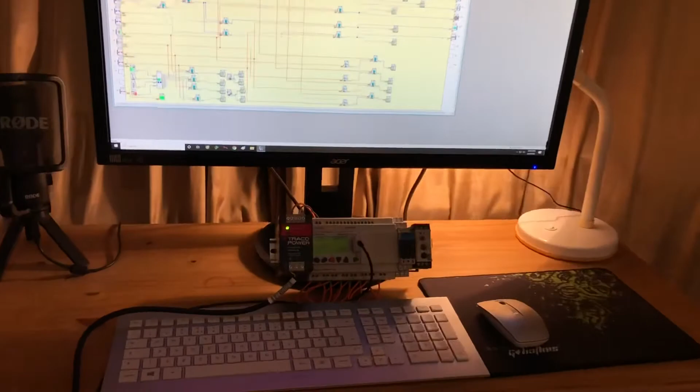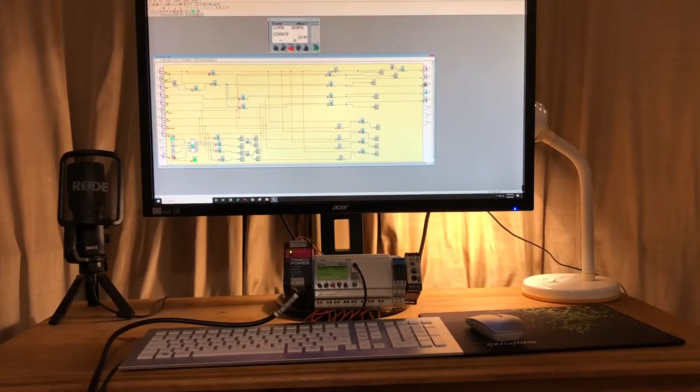Automation can be our friend, but at the same time can be our enemy. I observed that unemployed people and people who are bored want more complex technology, while people who are working hard, when they come home, don't want to spend 5 years taking special courses just to turn a boiler on and off. I think good technology should do all jobs for you.

Unless you're a computer or mobile phone maniac who likes to show your girlfriend how you change the temperature in your home in the UK while sitting on a beach in the Bahamas, I think a PLC should do it all for you.

I've worked for very rich people and also for poor people in my life. It seems to me that poor people like more gadgets, while rich people, when they come home, want only one switch to turn things on and off. But don't get me wrong, that one switch must be intelligent enough to do it all for you, and for that you need software.

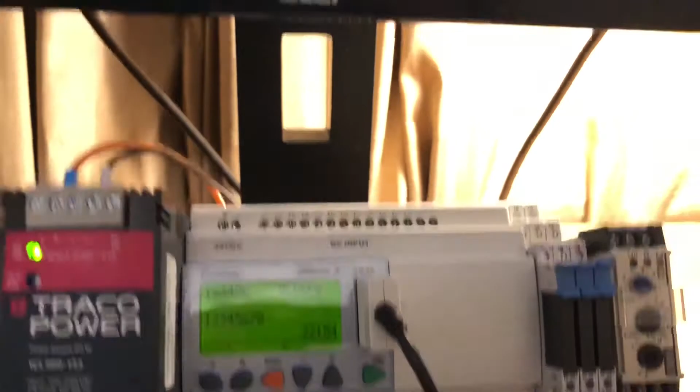If you look at this Crouzet controller, what you see on this screen, you'll also see on the Crouzet controller's display. As I said, the software is very easy to download from the internet, and guess what? It's free.

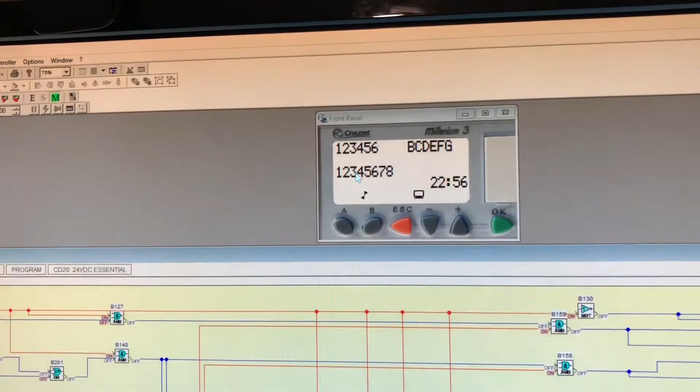If you look at this little screen, you can see that it has the same information that I have on this little PLC.

If you're interested in learning about the software, that's okay. If not, we can do it for you. All you have to do is press the switch I told you about, on and off, and this software will do it all for you.

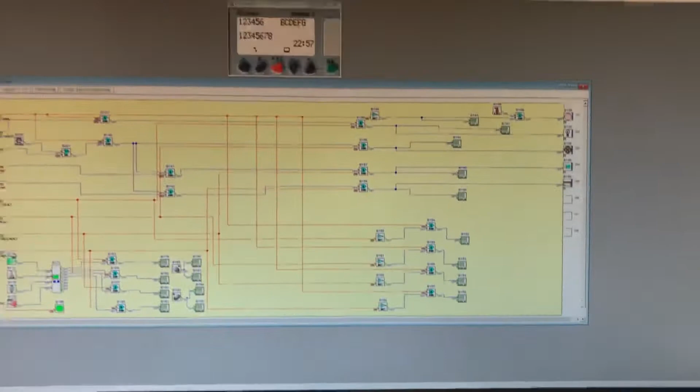So let's simulate a fire alarm failure. If you have a fire alarm failure, the screen will show you a fire alarm. Then, if you repair the fire alarm, the screen will come back to normal.

Then, if everything is okay, you want to bring the light on. And then also you want to bring the fan on, the cooling, and maybe the heating.

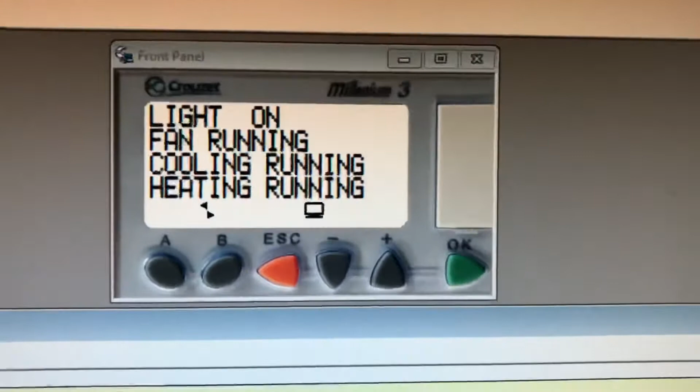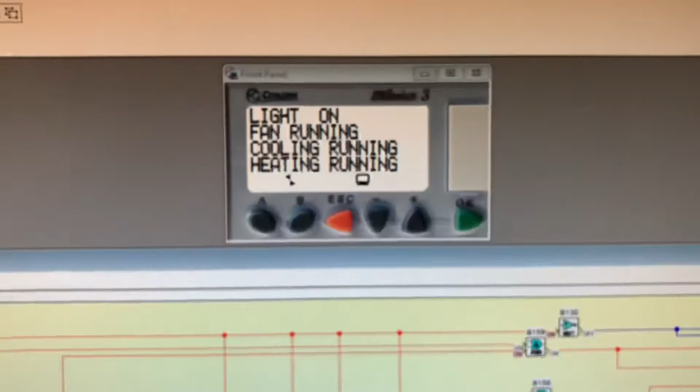Some people say, well, obviously I'm not going to use the cooling and heating at the same time. Yeah, you're right, that would cost a lot of money. I'm using this only in a very special environment where heating and cooling are both necessary, because I want to reduce the humidity without dropping the temperature too much.

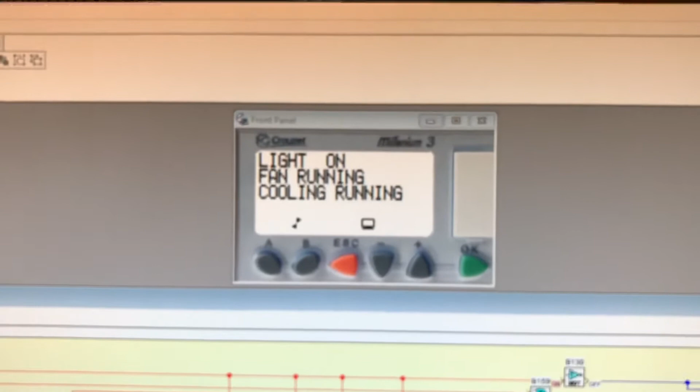Now let's say everything runs well, and I don't need a heater because it's very hot outside. I need only the cooling, but somehow the cooling gets faulty.

What's the beauty about this system? I can write it so it will be friendly. It will tell you the cooling fault - you don't just get numbers like 06, 05.

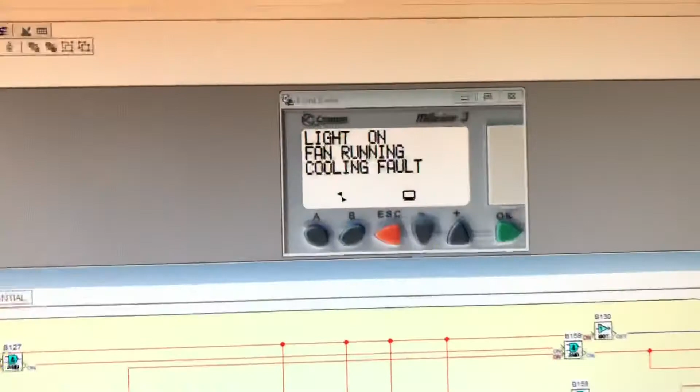When a technician comes into your home, you won't spend 5 hours trying to figure out what's wrong. Now I know some people will say, yes, but what if the heating gets faulty, will it tell us?

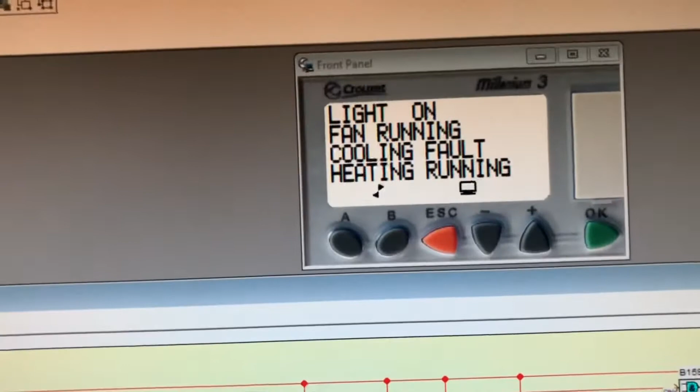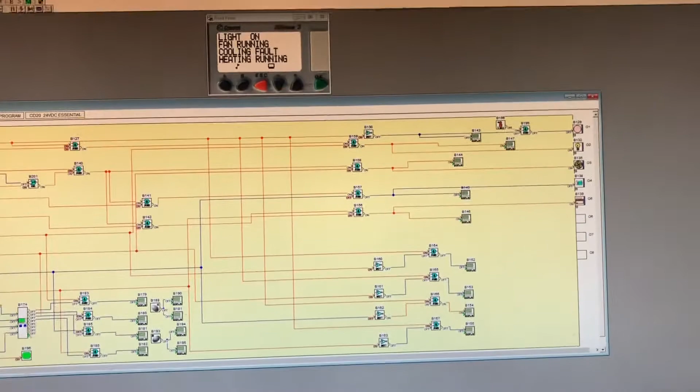Yes, you're right, but at the same time we can use other PLCs if you want, and we can link this input to a lot of features from your boilers, your refrigeration equipment, your air conditioning equipment, your lights, your circuit boards, and actually we can integrate your entire home.

Obviously if you have the possibility to run wires, because we don't like to deal too much with Wi-Fi. People say it's the future, but we want you to be independent of every Wi-Fi and internet failure. We want you to be in control.

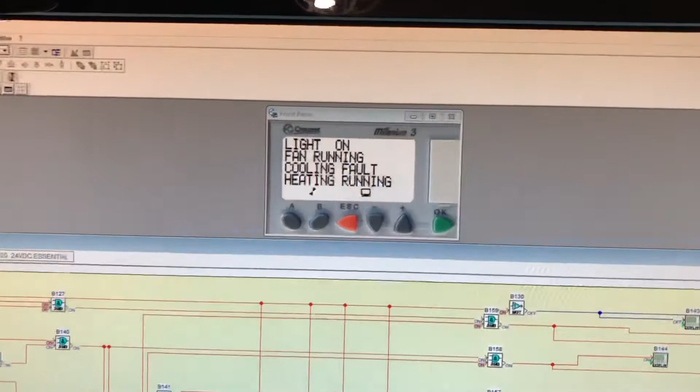A good PLC and a good program is like a soldier sent on a mission to deal with everything. I don't think you'll feel very happy being somewhere on holiday and having to check your mobile phone every 5 minutes, because you have an unreliable system which must be under surveillance. Then you become the PLC of your PLC, and life wouldn't make sense.

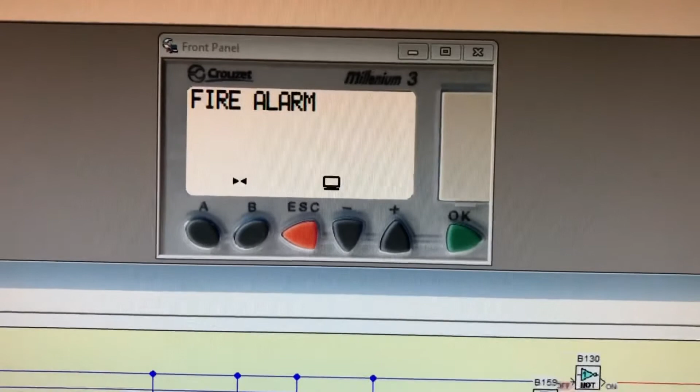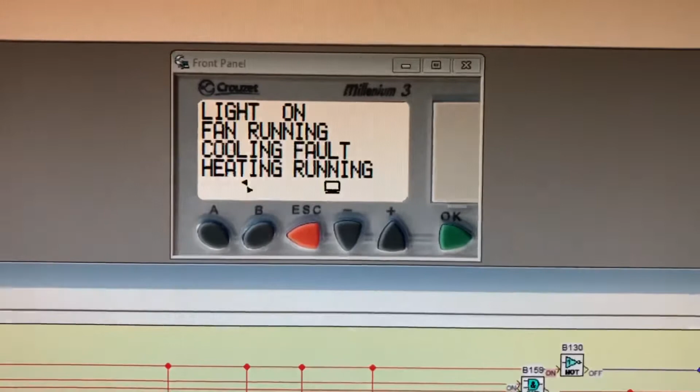So this PLC will control your home in the most logical way. As you'll see, everything runs well, but if you have a fire alarm, everything will go off. We can leave some features on, like the fridge or other critical features, because if they get turned off, you'll have problems at your return, like rotten food. So this is a reasonably good PLC.

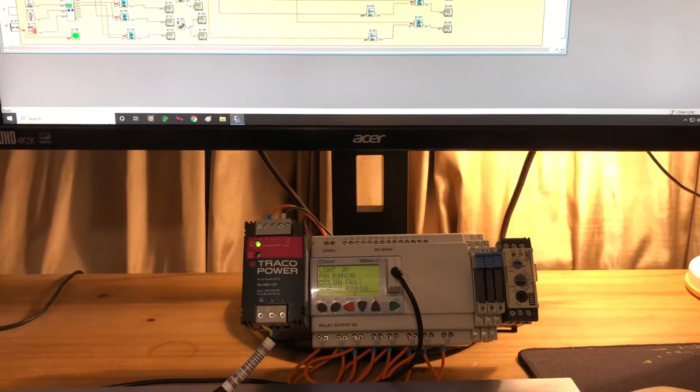The software is free on the internet, and after we install this PLC in someone's home, we can offer to provide training so you can write your own software. Also, you can have the software on a USB. If you mess up the software, you can download the new software so you recover what you did.

For some people who aren't interested and just want to live their life better, we can only provide you with the software. Obviously if you don't want to touch it, we still give it to you, but then you'll only deal with the PLC, turning the system on and off, turning the heating more or less, etc. So this is a great system.

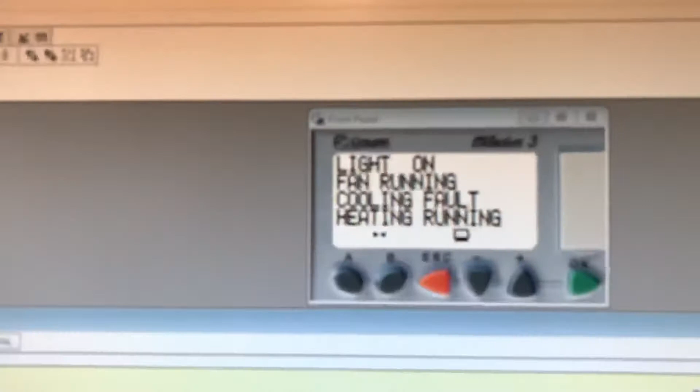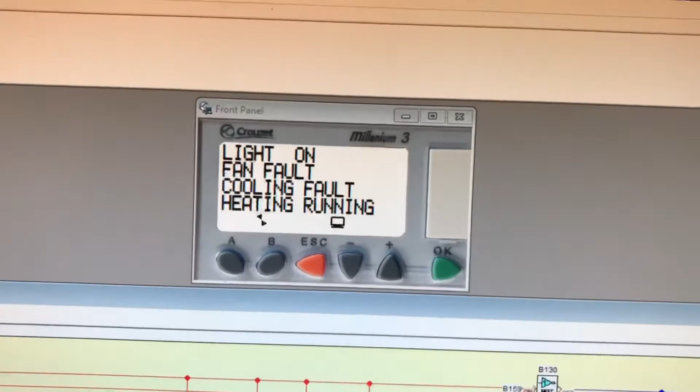I made some demonstrations for you. The greatest benefit with this type of system is the possibility to write down what faults you have. This is great because you don't have numbers which scare you, like 889FQB. It will actually tell you the light is faulty, or tell you the cooling equipment is faulty.

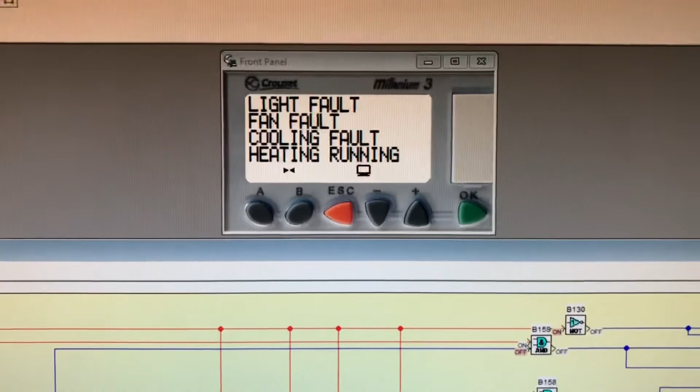And if you want, I can integrate the heating or cooling system at a higher level, where I can tell you the boiler's fan is broken, the boiler pump is broken, or the heating agent flow has an issue. It's up to you.

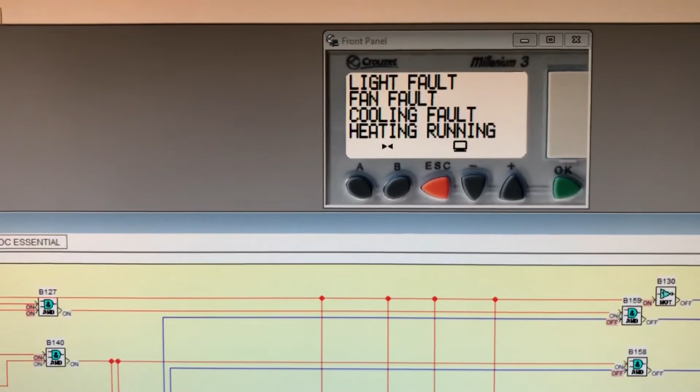We can start with the basics and make it very complicated, but we are extremely transparent, and once we do this software for you, we'll give you a USB and you'll have a copy.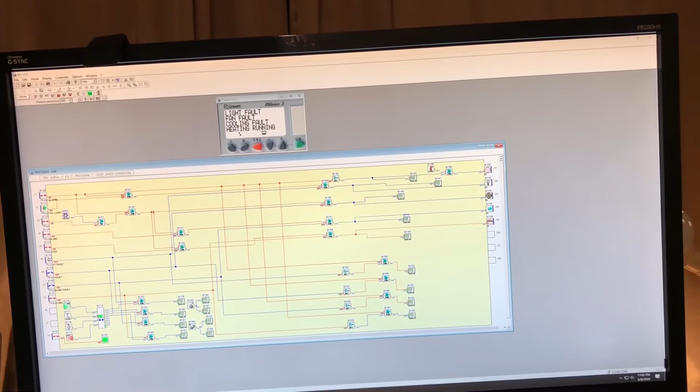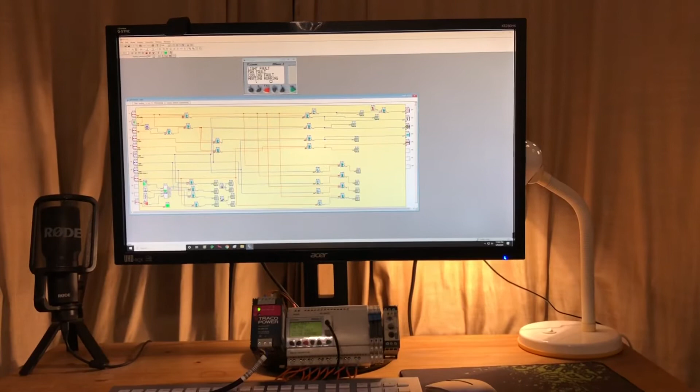We can teach you how to log into the PLC and download the software back, and if your PLC gets damaged in the future, you can buy another one and download the software yourself. You don't need to call technicians every day to your home to repair the PLC or to be ripped off. This is an unlimited possibility of creating a system where you feel in control.

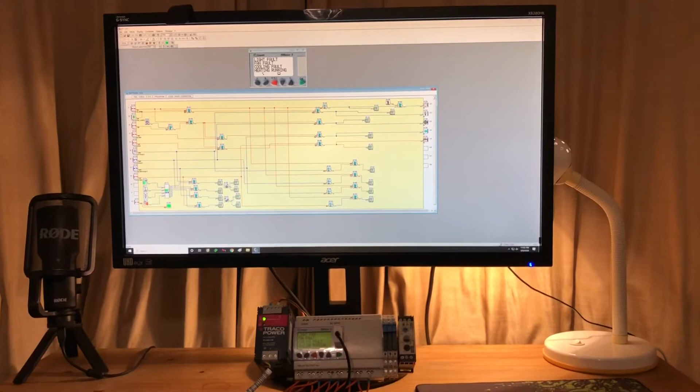If you want us to do only the first little integration for you, that's okay. And if you want training because you want to do more yourself, we can even provide this. And if you choose other PLCs, we can also train you to do that.

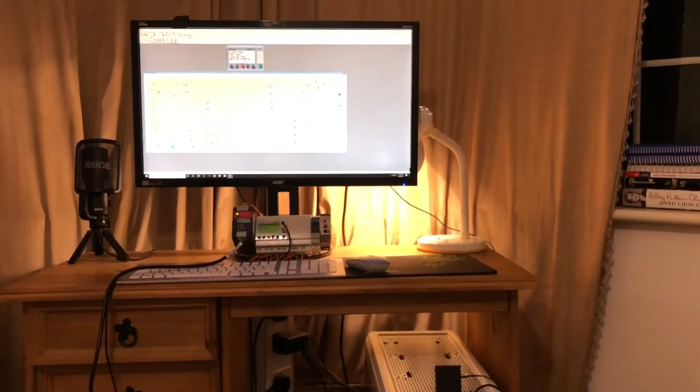I think this Crouzet controller is a good PLC, and because I am not a salesman and I'm not dealing with Crouzet, I came across this accidentally and installed it for myself. I love the fact that it's not using internet. I always prefer intranet because I don't like someone cracking into my system and making my home's lights do like a Christmas tree, or Alexa, or some other rubbish. So basically I recommend this PLC, or any other PLC, which connects to the internet only if you want.